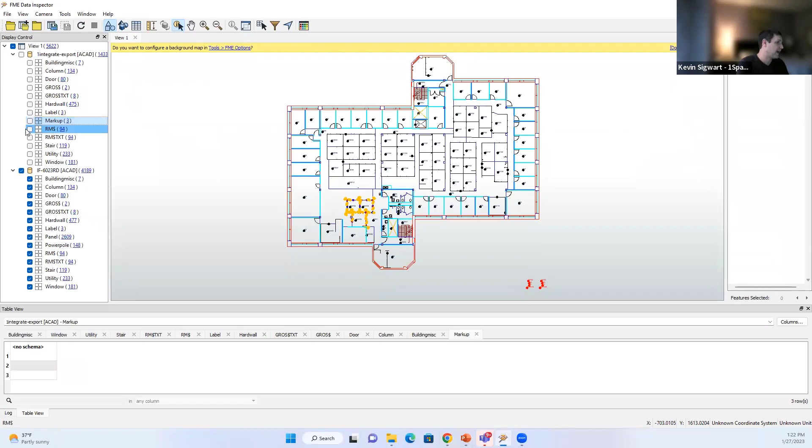For example, in this case, if I open this up, I have this markup layer I added here identifying what issues are in the data set. Here's where it's flagging some sort of gap, and if we turn on the rooms, you can see there's a gap in the room at this location, which is why it's being flagged.

As part of this, as the end user or contractor, I'm getting instant feedback—I know right away whether the data is going to meet the standard. I don't have to wait for somebody to review it to tell me there's an issue. I'm getting a report that helps me actually clean the data set.

As Google, I'm also getting the metrics—I know that my contractors are using the system, what they're using, and I can see how the quality is trending over time with the data they're working with. As the engineer, I can see how often I'm submitting data and how my data is conforming over time.

But then if I go back to Google's view, I can see who's using the system, and how the contractors are performing in general on data quality. Are they improving? Are they sending me data? I understand they're going to use the system to validate the data and make sure it's meeting a standard, so there will be issues.

But are they submitting data for completion that is not meeting the standard? Those are the types of things we're looking for. If you have certain contractors that are underperforming, that's good information to know, especially when you're re-upping the contract for future years—getting that information matters.

Just to share, we're working on a lot of translator projects, and I'm hearing a lot of this right now that I'd love to follow up on.

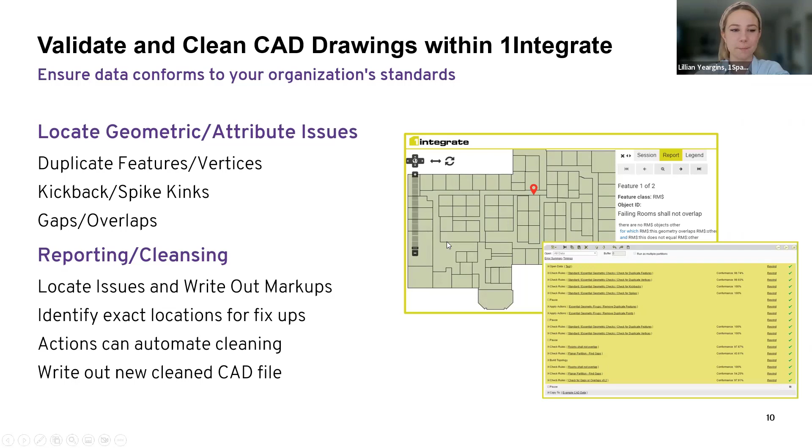Another area we work in beyond just validating CAD drawings or validating GIS is integrating data sets, for example integrating CAD to GIS. When you're trying to do this, there's a variety of issues that typically come up.

A lot of times, AutoCAD drawings are in paper space, not necessarily geographic space, so you may not have coordinates. If they are, maybe they provided a WLD file with just two reference points in the data set, so you still have to do a lot of rubber sheeting. In those cases, the CAD data doesn't always align to the GIS. And in many cases, the CAD drawing is actually more of a schematic representation, not necessarily the real world. So we help organizations take these AutoCAD drawings, given those challenges, and integrate them into some sort of GIS, or vice versa - it goes the other direction too.

The example I'm going to highlight now involves taking some butterfly drawings of electrical manholes and incorporating those into a GIS, then inferring where the feeder lines go throughout the entire network - basically auto-generating feeder lines from one end of the network to the other just by looking at the manhole information.

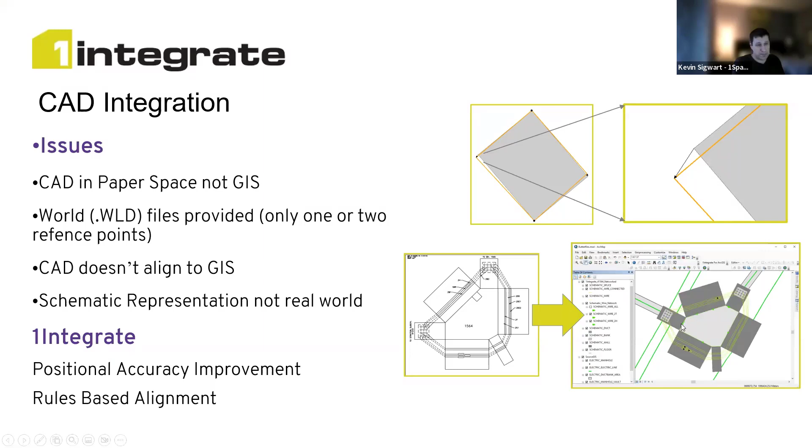So we have to figure out how to take this data set and incorporate it into the GIS. The other issue is that all of this information basically has no real context, so you have to infer what it all means. The best thing going forward is that we have a number we can pull to understand which manhole it actually is, and there's a corresponding floor plan of the actual manhole drawing inside the GIS to incorporate these two.

So basically what we do inside our rules engine is we use the information to first try to figure out what the actual objects in this drawing are. So determining where the actual floor is, and once we identify that, we can say, given that information, where are my walls, what's the banks, what's the ducts, where's the wires.

And then we can actually use the labels and the labeling information to infer what the feeder information is. So in effect we'll end up with the feeder information for all the wires, and we'll know what the manhole, we know what the floor is, so we can use that information to figure out how do we get this into the GIS.

So then basically we can look at our GIS information and look at the manhole, because we know that it's not only in paper space, but it's also rotated in a way so that north is not up. You have to figure out, well, how does this actually fit?

So what we basically do inside the rules engine is throw a number of different scenarios at it. We say, okay, look at the manhole, compare it to what's in the GIS, and then we keep rotating it around 15 degrees at a time and comparing it to see which one is the actual best match. Once we identify the closest match, we then shift and rotate everything, all the objects in the drawing, so that we have the schematic representation actually in geographic space.

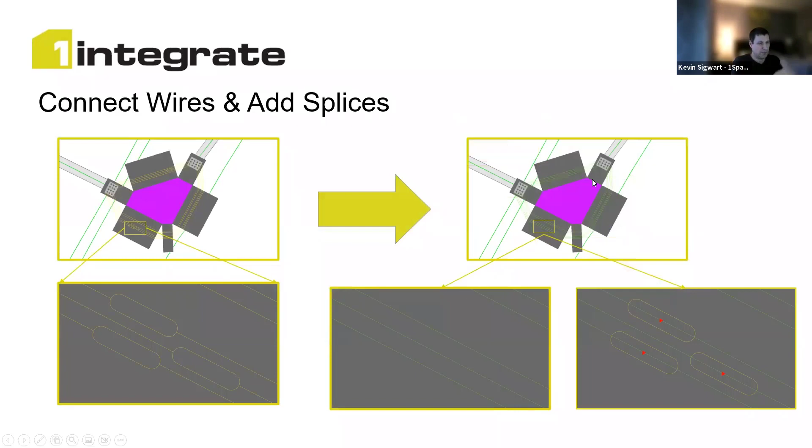So grabbing the wires and so forth and doing all that information, as I mentioned before, figuring out what the feeder ID is based off of the information that's in the labels in the drawing. And then taking the wires and basically wrapping them around the base of the actual manhole.

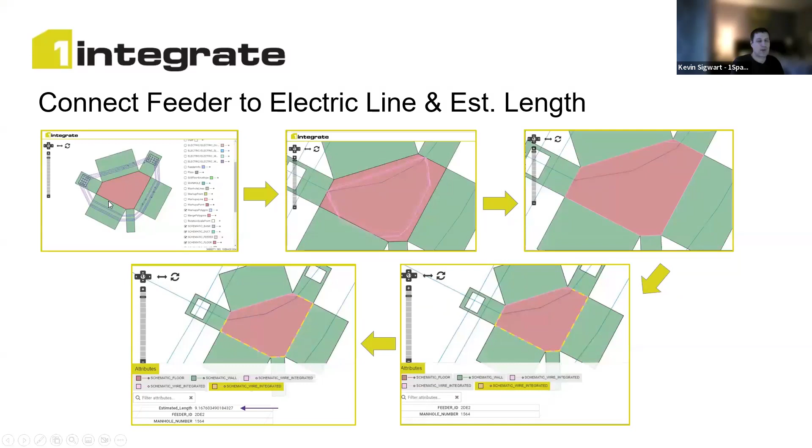Now this one's not as complicated. They get a lot more complicated than this. Some wrap around multiple times. So what we also did is we wanted to figure out what was the actual distance if we wrapped it around the actual manhole drawing.

So once we do that, then it's like, okay, well, that's fine, you did it for one drawing. We have hundreds of these, right? So how do we take that and format it so that we can apply it to hundreds?

So what we did is we took that example, ran it on all the drawings, and said, okay, well, what do we get from there? And what we found is that, yes, the first time I did it, I realized I didn't take some things into account, like the ones that are a little more complicated.

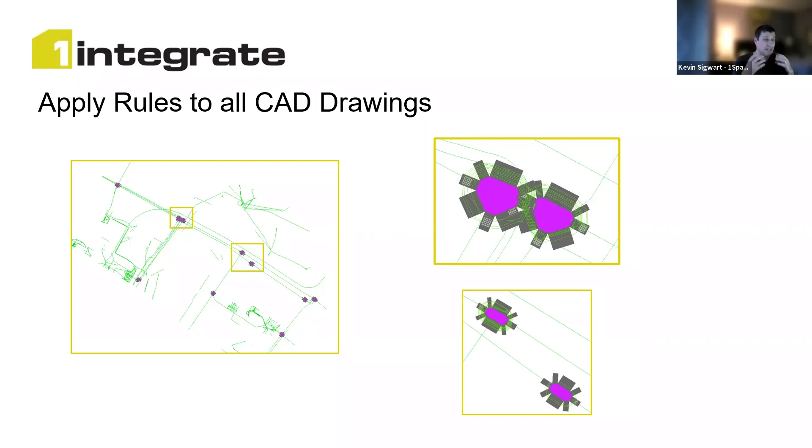So what we did was we tweaked the rules a little bit and then reapplied it. And when we did that, we were able to get about 90% of the actual manholes into the proper GIS space and also identify the feeder information and where those feeder lines actually connect to. So we can in effect generate for each individual feeder where the line is going and where it's coming from, inferring all that information from those manholes themselves.

So that was one use case, taking a schematic representation of a CAD drawing. Okay, so any questions regarding integrating the CAD drawings into the GIS?

I guess Andy always has something to say. Well, I guess I'm a little confused in the sense that, is the ask by the client to take schematic CAD drawings and turn it into a comprehensive GIS data set? Is that the intent?

I think so. The intent was to be able to understand where the wires are going, and they didn't have any of that in the GIS. So by taking the manhole information, you could see where the wires are coming and going at each individual manhole terminal or manhole place, and then follow the electrical lines and see where the wires are going as they go through the entire network. That makes sense.

I guess this is probably a good time to open the floor to the others to effectively say, I know a lot of people in municipalities are asking, can you take your Civil 3D drawings and turn them into geospatial data to get to us in a certain schema compliant format? Some of us are doing that, some of us are pissing and moaning about it, some of us are not doing it, and some cities are having a bad job making it happen.

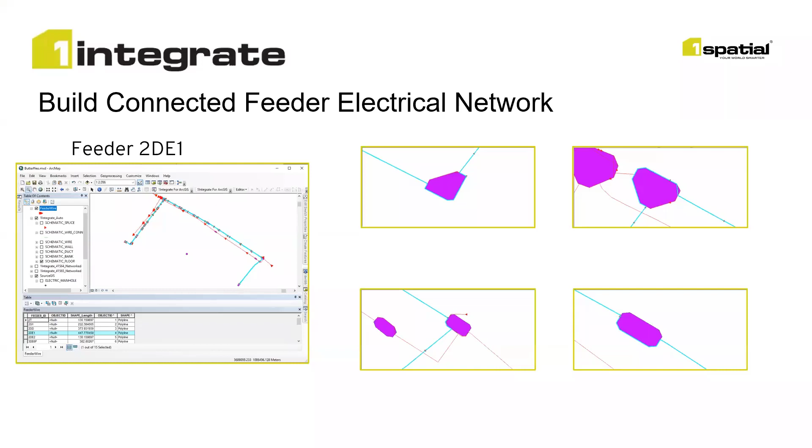Well, a lot of this also goes back to data governance too, and setting those standards - who's the owner of the data, and if they're the owner, what standards they want their data to be applied to. Speaking about making sure certain things are on the right layers, that's something we've done validation checks for. Like for Google, we have to determine are the doors actually on the door layer? We do that by looking at all the objects, and do the objects actually resemble what a door would resemble? Then comparing the doors to the walls - if there's a door, there should be a gap in the wall where the door is. So that's ways you can infer where doors should be, making sure they're actually in the drawing itself.

For something like, are the water lines on the right layer, you could calculate the distance of water lines on this particular layer, and does that actually make sense compared to what our inventory says it should be? If it's within 5 to 10%, you're probably doing pretty well. If it's 10% or more off, then you're missing something in that data set.

So Kevin, let me ask you, is this something - for example, if I worked at a company that just got 1Spatial and 1Integrate, would I, as the person who goes between them, have to do all these rule setups? Or is that something y'all have out of the box for me to build on per my personal usage?